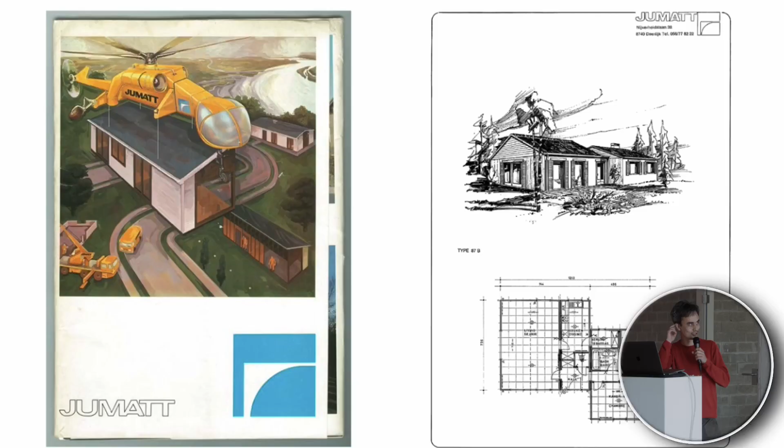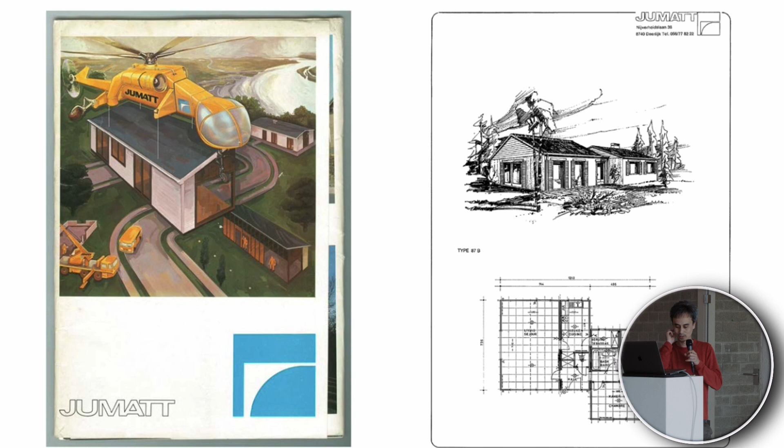So Superjumatt comes from Jumatt, which is a brand. It's a little project which doesn't have very much link with schools, but at the same time has a lot of thematics that we developed later on. Jumatt was a brand in the 70s for prefab houses. It was a bit like Jean Prouvé, what he tried to make in '54 with helicopter-delivered houses, but in a totally different context. Here it's more in a Belgian context. It's a bit industrial, but also a bit conservative.

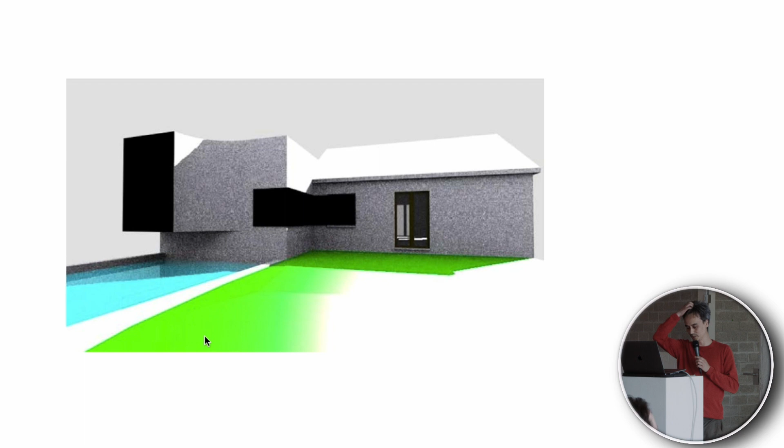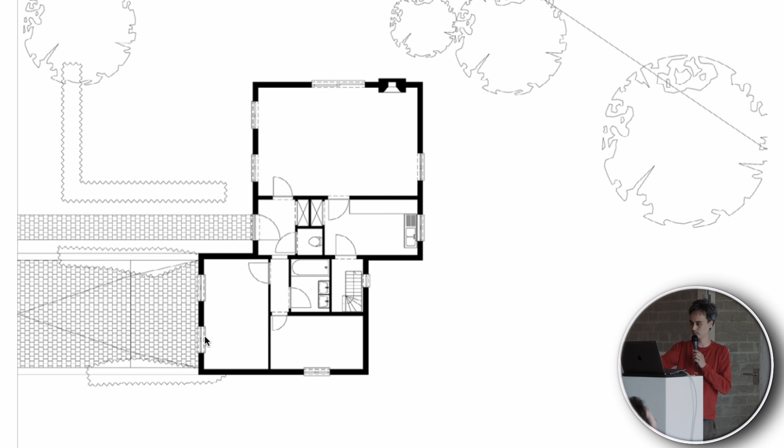So we show you first images of what we didn't want to make. The client wanted absolutely a kitchen and a pool at the back, but the context was so strong. We thought: is it really worth making an expressive contemporary little jewel at the back, or to really take the context such as it is? When the context is stronger, sometimes it's useful to use it as a first material. So it's a bit literal, but we extend it literally. This is the existing plan on the left side with the garage, and at the back on the right side the garden. We just add a kitchen and a swimming pool, and add a little living space upstairs.

So in section, it's like a half story going from the garage till the kitchen, so you can deliver your groceries and have the view on the landscape at the back.

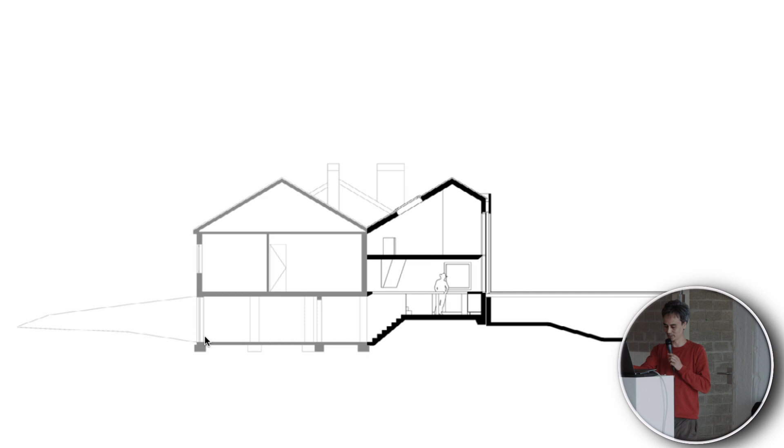So it was not meant to be an extension of high-class architecture, nor architecture of extensions, but more, our goal was to work on a global environment, with pitch roof, with wooden lintel, with the context.

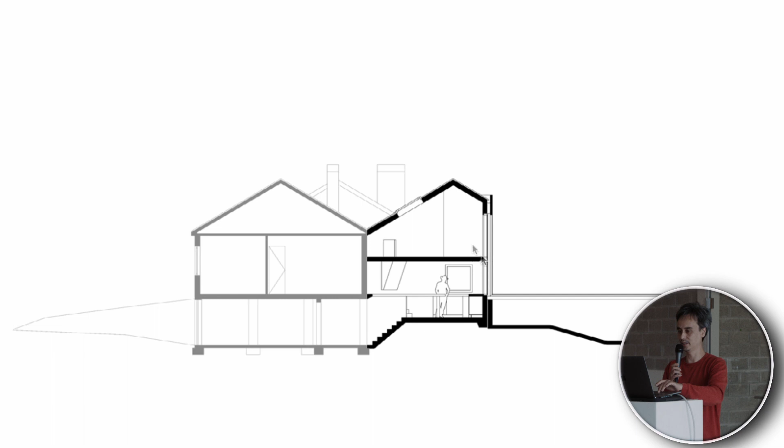So we developed the same lintels, the same details as the existing houses, with wooden lintels, with a pitch roof, but we decided to displace a bit, to have a cut. I'll go back to the section to begin really with architecture here, and not here, such as what was intended.

That's how details often go after a global idea, and it's not details for the detailing's sake, it's details that are developed with a general idea of the project.

I pass the mic to Michel, who will present another extension, but in a totally different scale and context.

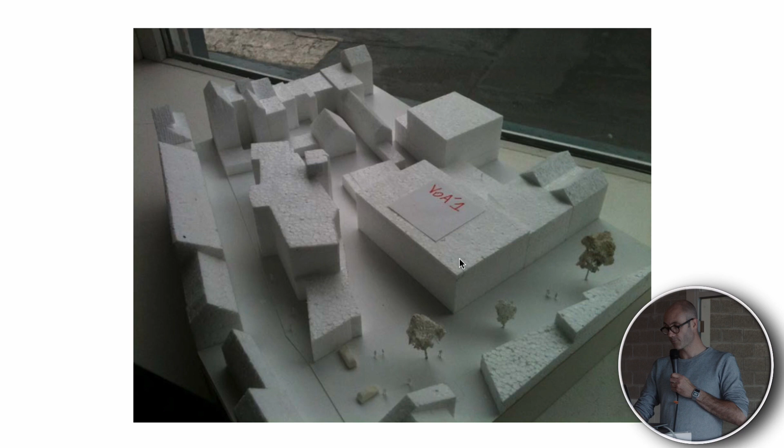And we had lots of trials. In fact, we took 2 years with the urban planners of the city to succeed, and after the 8th project we had a solution. So those are volumetric trials, but this is the solution we came to in the end, quite a simple one.

In fact, there are two main buildings. One for kindergarten and primary school fills up the existing urban fabric. And the other one is connected to an existing building of the school, but it's more a freestanding, simple block, which is quite high, quite dense. The reason is also because doing this we leave more space for outdoor spaces, since students also go outdoor.

In fact, this building, we will focus more on this one. It was too big to hide, so we decided to make a story of it, because the historical context and everything made it quite a discussion.

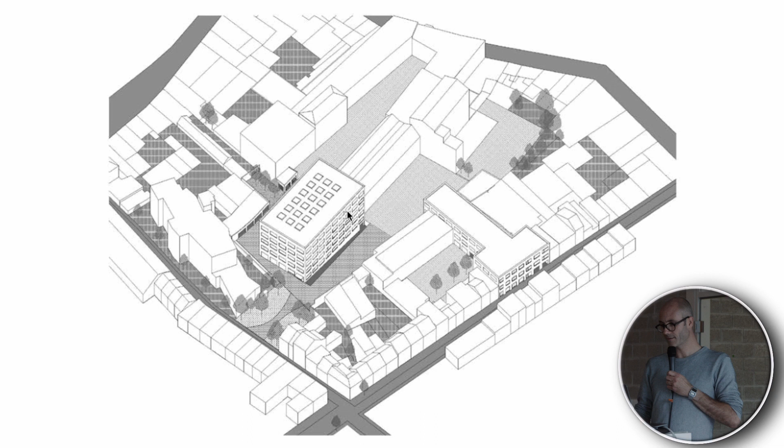And thinking about that, we just bumped into this existing building, which is not in Mechelen but in Brussels, not far from our office at the time. This existing building was quite strange, and we found it enigmatic, very monolithical.

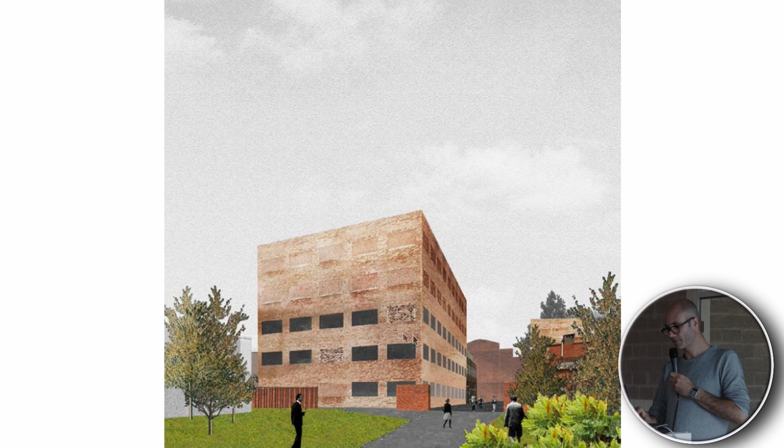You don't really know when it was built or what is in there, and we were pretty much interested by this strangeness, and we tried to transpose it into our block. Doing this, we found that there was an interesting dialogue with the big partition walls that were already on the plot. There were huge brick partition walls already there, that were not meant to be covered by the other buildings.

So we transposed this interest we got from the other building just to make it work. Was it there before, or is it an industrial building that was refurbished, or newly built? You don't really know the answer.

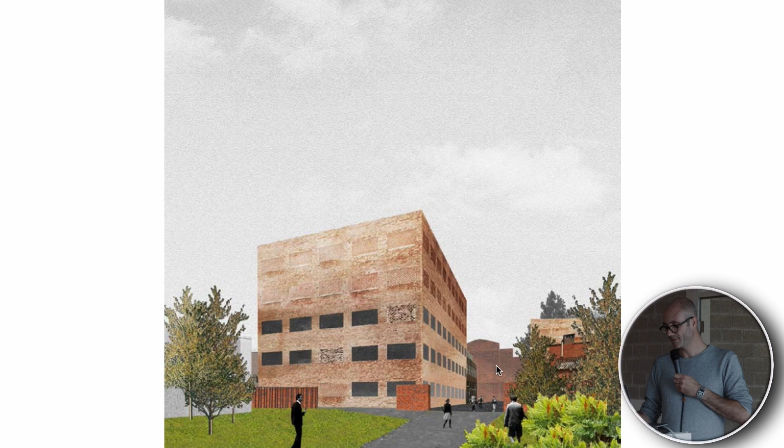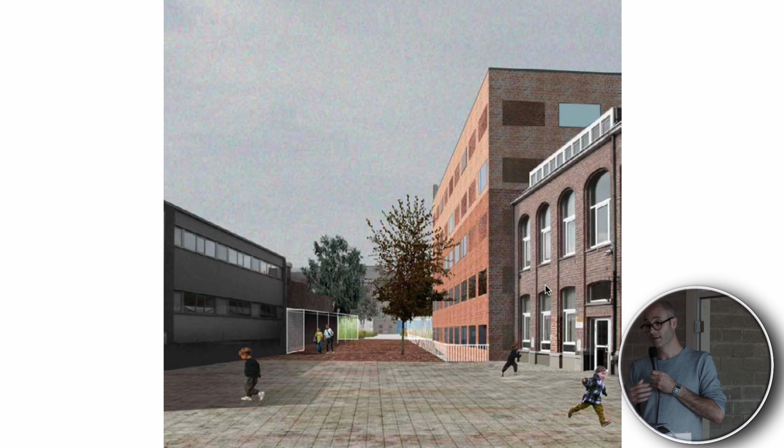And in fact, the solution turned out to be a good one, also for the urban planners. And even the client asked us to make it one story higher, because, let's say, if it's big, then let's make it big.

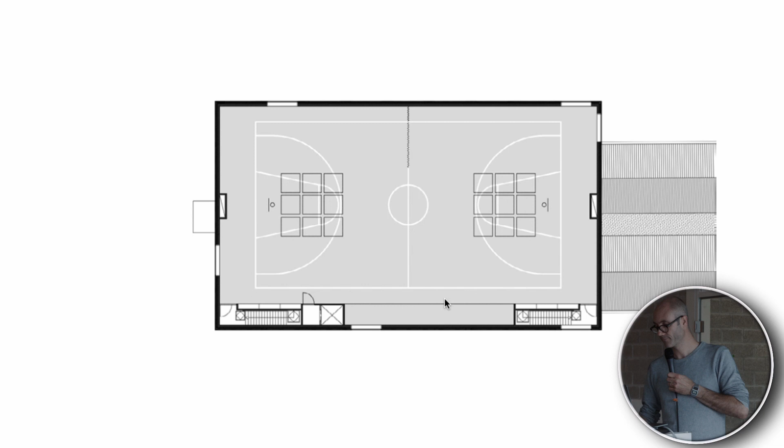Detailing a bit more this building. In fact, the volume is very simple, and it's meant to shelter the biggest space we had to shelter, which is the sports hall. So the building has almost the exact dimension of the sports hall, adding the circulation and the storage. We decided to put the sports hall on top of the building, quite naturally, because a sports hall needs a big span, and then we could cover the span with quite light steel beams.

If we would have put the classroom on top of it, it would have been huge concrete beams. So under the sports hall there are three stories of classrooms. Quite simple organization. In fact, there's a central circulation in extension to the circulation of the existing building.

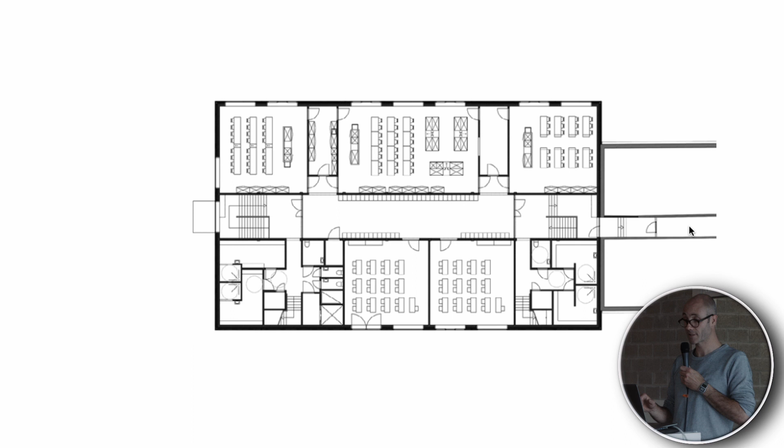As we're speaking about schools, and this lecture is maybe about school, those classes are lab classes, science lab classes, and they are meant to be connected together. This is the experimental space where the teacher can give a lesson to two classes at a time. So he starts with one, starts doing things like this, and then he goes to the other.

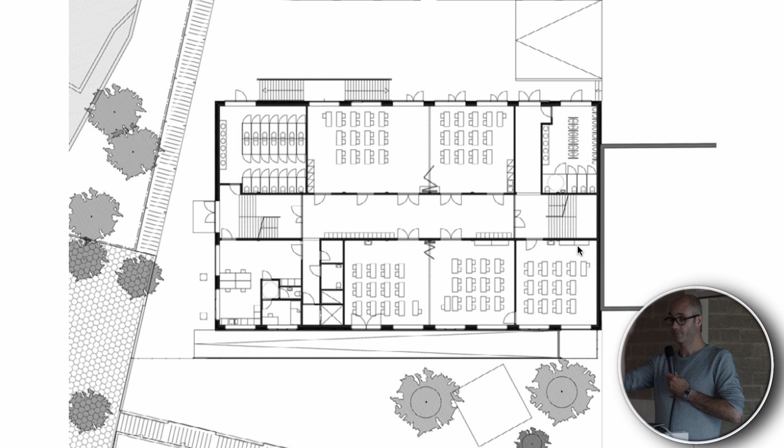These are the classrooms. This one is the lab. On a structural point, you can see it's a very simple structure scheme. You have two structural lines in the middle, and so those spans are smaller.

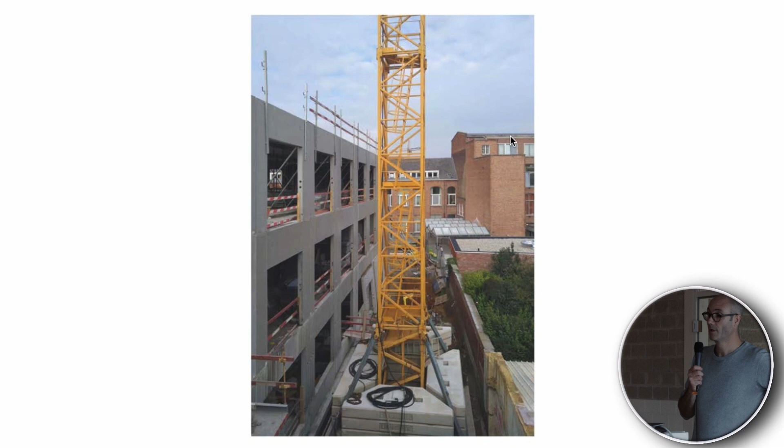We can use mainly prefab concrete construction because of the budget and because it's quite fast to build. This prefab construction is meant to be as generic as possible, as systematic also.

Our practice is to construct buildings that can become smart ruins. This is a quote by Bob Van Reeth, who was the Flemish bouwmeester at the time, and he said a building's structure should be able to be transformed in 100 or 200 years, and you can still use the building.

There will be slabs, there will be windows, and you can change the rest, but you can still keep the skeleton. And so on this very generic skeleton, we put a brick cladding, which comes a bit like a dress on the building.

This brick cladding also brings a solution to the inner plan, because some windows are not needed, so we just close them with the bricks. But still, we wanted to keep them a little visible on the facade.

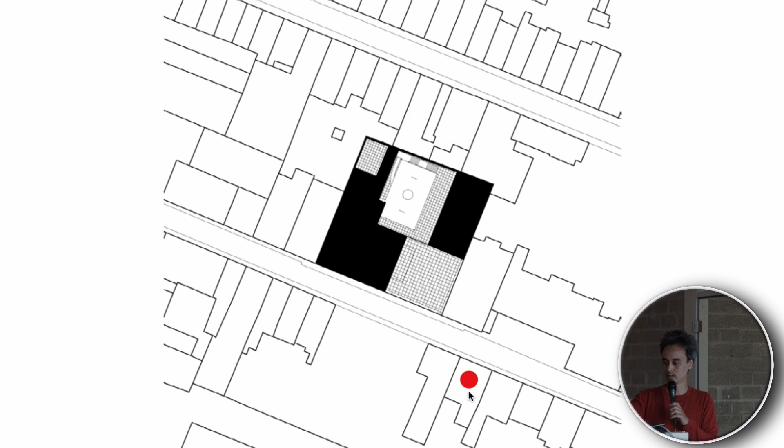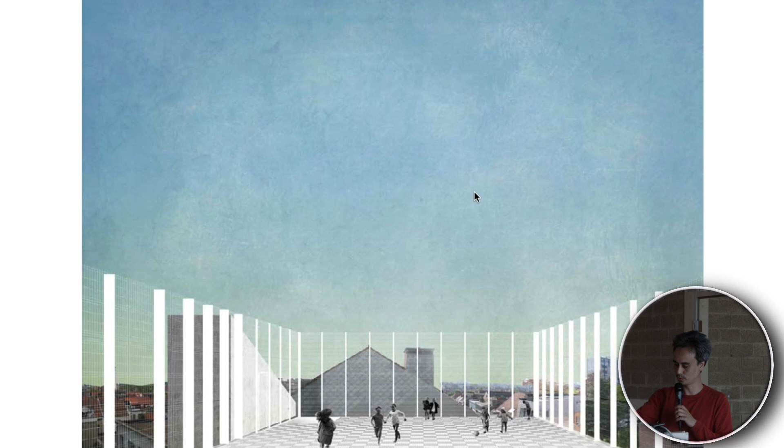So here is the existing building, and on the right side is the little houses. But we decided to add and concentrate the program at the same place, and to add those 3 classes right in the plot, for facility reasons, for circulation reasons, for everything. But by doing so, by increasing the density, you increase the context as well, so you have to take care of the outside places.

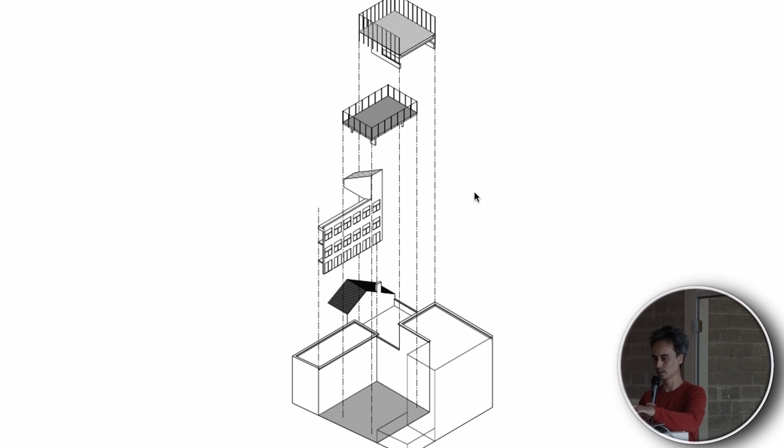So it needs open areas that are bigger. Here is the top view with the kindergarten places. It looks like huge interventions, but in fact it's really a lot of tiny interventions. There's the open space for the kindergarten at the top, the 3 classrooms just underneath it, another playground.

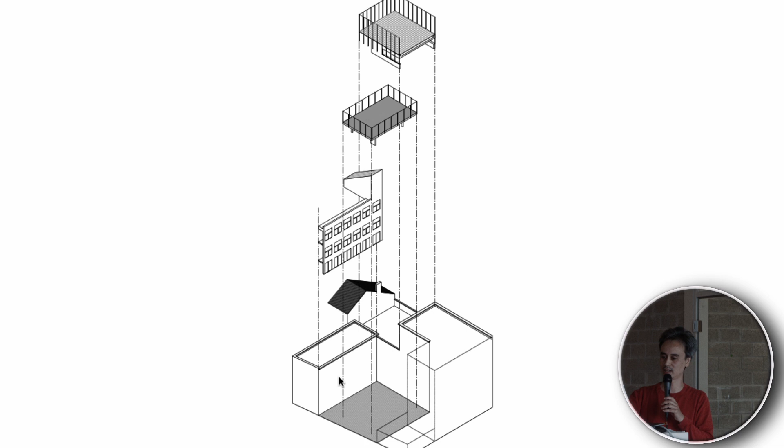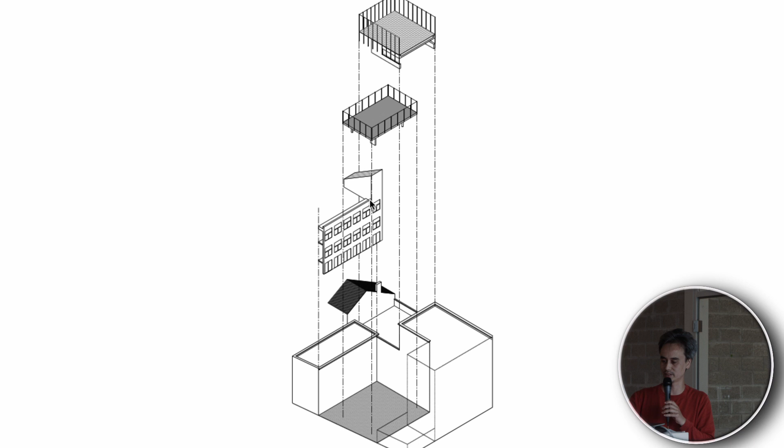Places in addition to the existing outside space, and a corridor that gives access to the existing classroom, because before that you had to cross one class to get to the other one. By adding that second skin, we could also - it's not ideal to have rooms with second daylight, but here it was so crowded that we've added really tiny interventions.

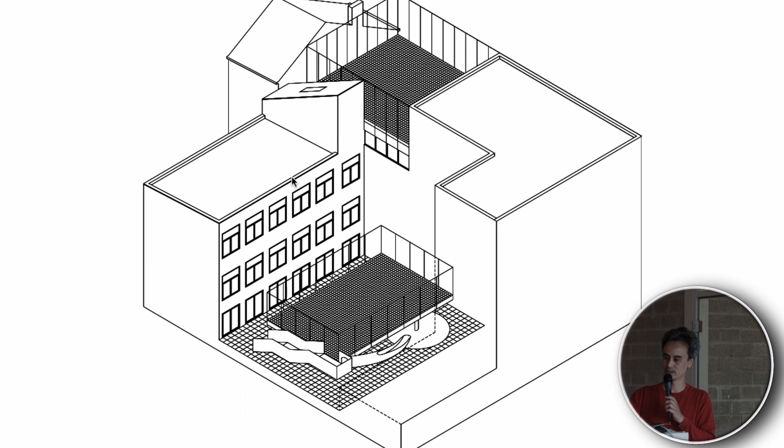Even so there are tiny interventions, we try to keep a dialogue and to be quiet with the different materials, so the interventions at the top have a bit the same quality as the one underneath. The windows' dimensions are the same as the original classroom, and we paid a bit of attention to the structure and the color of the existing materials.

So this is the plans from the top. This is the daycare, and they profit from that area at the top, looking at the streets. Those are really cheap solutions, just net for playground places, but by repeating it gives a lot of transparency. We also like to work with common materials and, by tuning them a bit, we often look at ordinary things with another step.

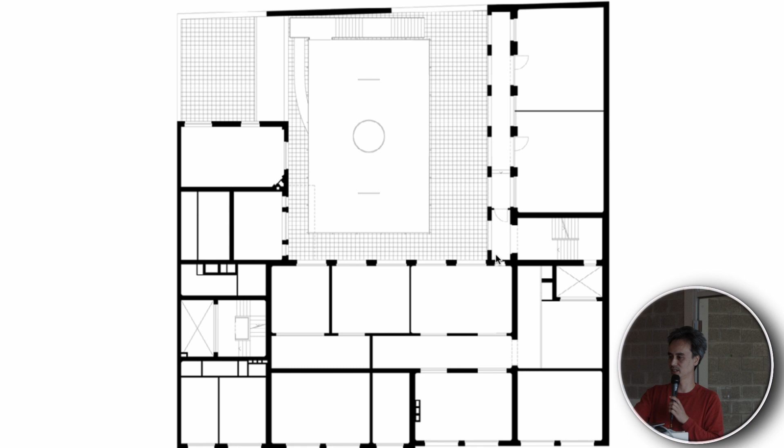So this is only the plan to show where the corridor stands, and that was the existing open area. This is the view from the inside.

This is the existing wall with a rough coating, we call it cimentage, Tyrolean coating, a bit rough. On the other side, the new part with the same windows. In fact, they are so huge that even if it's not immediate lighting, the proportions give a lot of daylight during the day.

The corridors are also used for other purposes. They are really well used by the children.

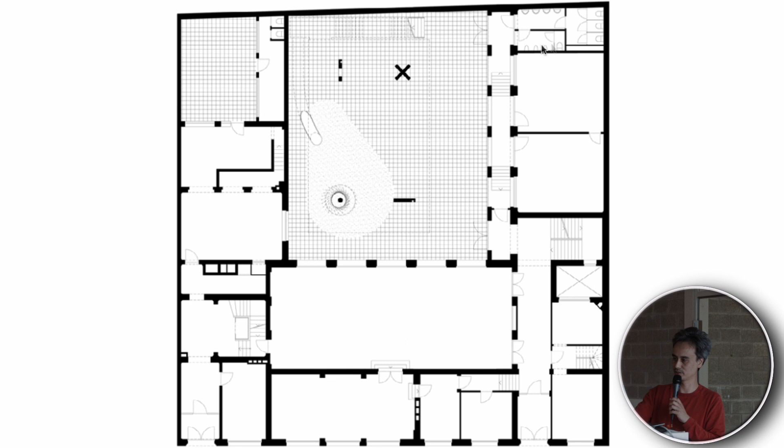Here it shows also the corridors leading to the different classrooms, the little sanitary block that was asked for, now inside. And this is a collage from underneath the open structure.

It shows the importance of the foot, that every foot, even if it's a kind of heavy beton structure, we can every time play with different elements and thus give a sense of small scale elements.

So as I said, every foot is developed as a thematic: to climb, to draw, to hide and seek, to slide. Even so, if it looks monumental.

What we like is also to play with the existing and the new building. Where does it stop? In fact we reused the existing bricks and decided to make it appear such as the extensions began here. But this is reused windows, this is reused bricks. By doing so, we push the limit further and compose with the whole plot, not just add a small jewelry, but play with the whole environment.

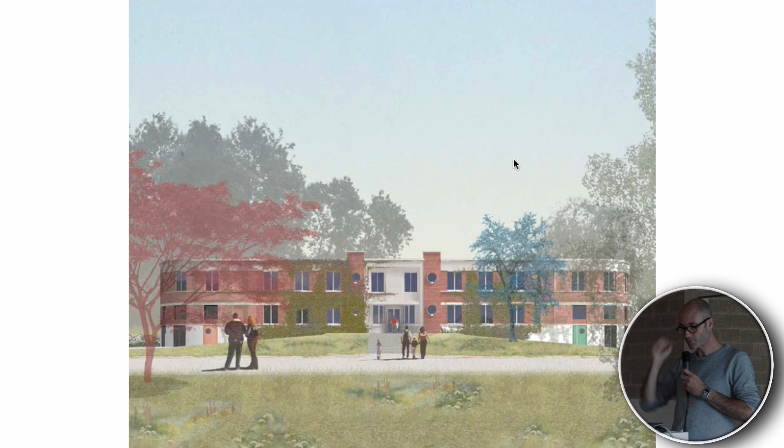It's located in a very countryside environment. It's a daycare center for autistic spectrum disorder people, quite heavy ones. And it's also a dwelling for those residents.

There are two dwelling units of 6 people. So the intention behind this is to keep it in a more family scale, so not to put a big dwelling of 12 people, but two times six. So there are already two parts of the program.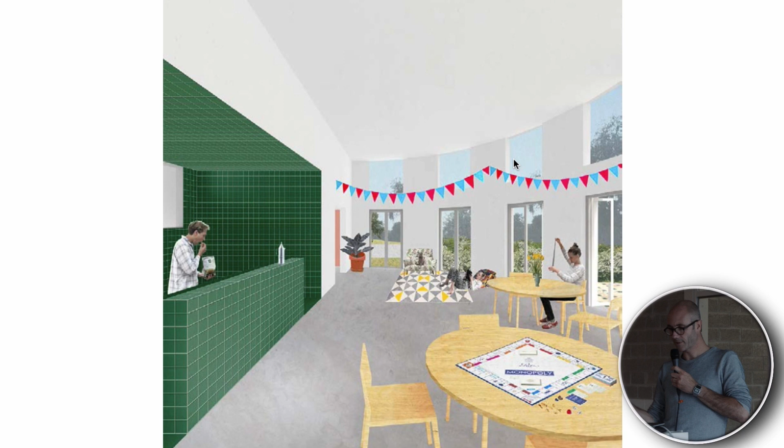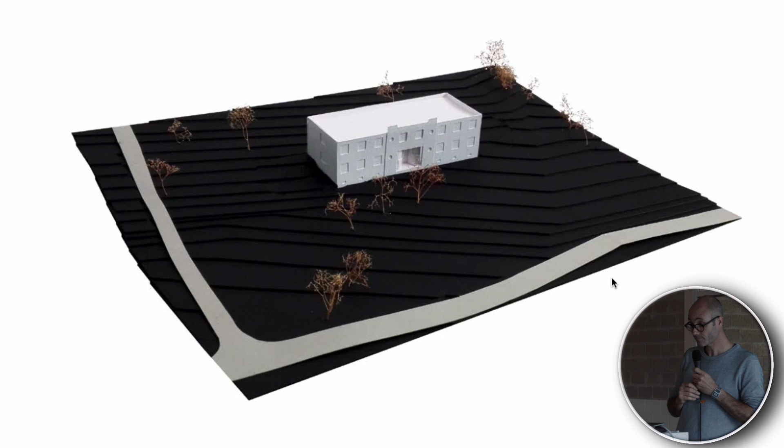So the first step we made in the project, which was a step asked by the client, is to get rid of the extension and keep the main building existing. In fact, at first the demands of the client and what was in the mind of the client was...

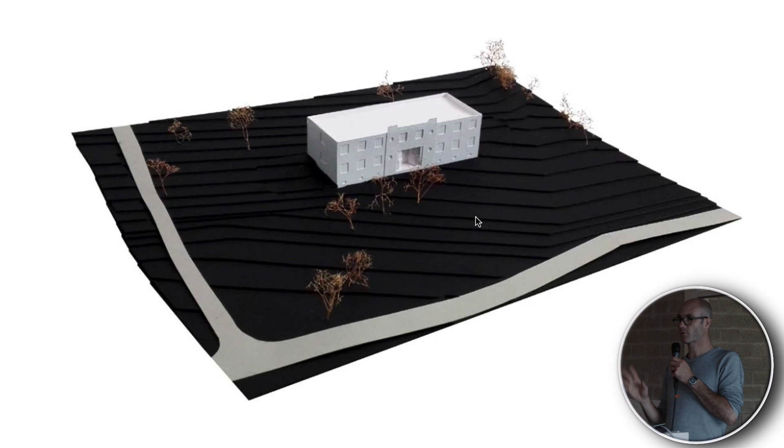to add a new volume, to put the dwelling area into this existing building and to make a new contemporary building for the daycare center, a separate building. What we did, as you saw before, is quite different.

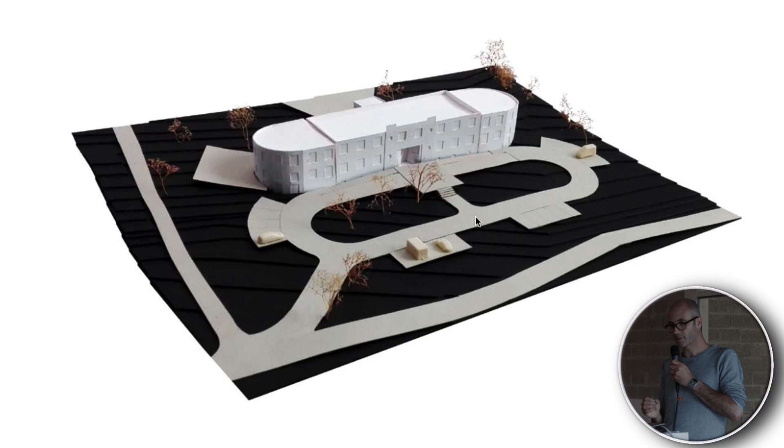In fact, we took advantage of the very symmetrical and rigorous composition of the existing building to extend it on the sides, putting the two dwelling units there.

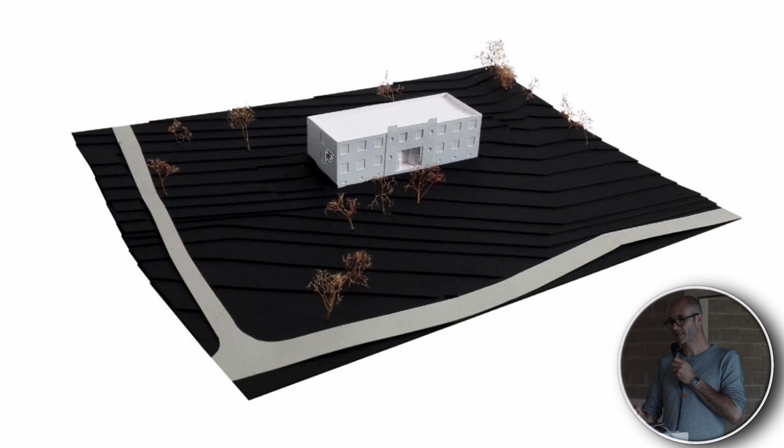So the program was already symmetric, so the building just asked for it, and we put these extensions on the side walls that were almost blind. There was already the connection for the new extension, in fact.

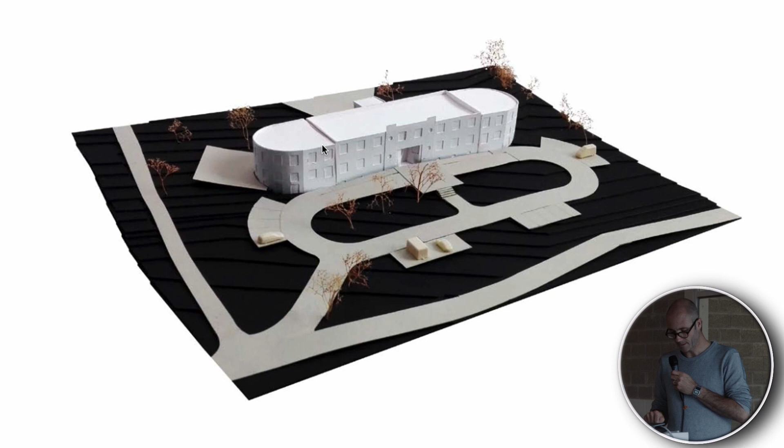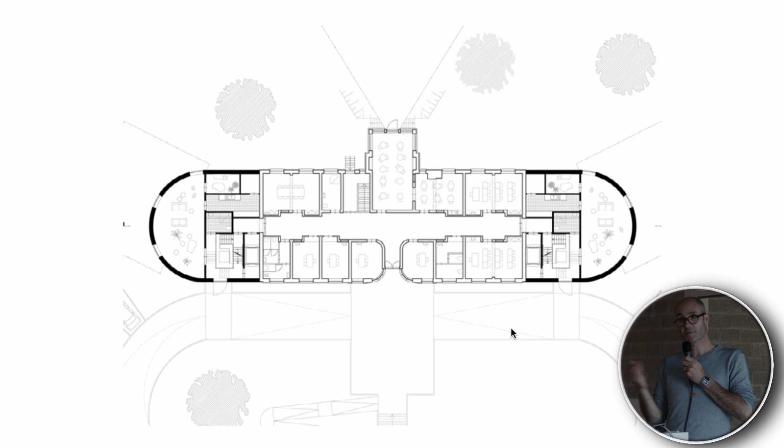Here is the living space, and they each have a separate staircase and lift. It was quite important, as we understood from the team, to have very clear spatial marks for the residents, so everyone has a door for the place where he stays.

On the first floor, here in the extensions, we have some bathrooms and also some play spaces and therapy spaces.

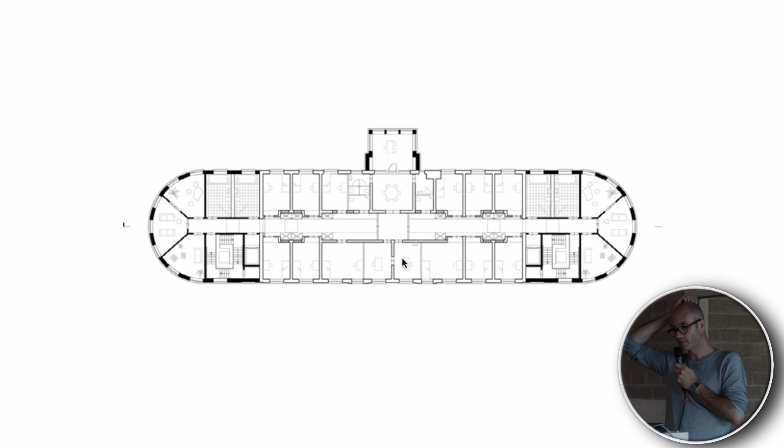And on the existing building, we find six sleeping rooms on both sides. And in the middle, you will find the offices of the team that stays at night, and the caring team.

In the section, you can see that the living space is on double height, and the first floor connects to the existing building.

This is a view from the caregiver office. You can see that the surrounding is very natural and peaceful, which is, I suppose, a good idea for this kind of program.

These are the living spaces, which are curvy. We were talking about it previously, but at one time the team told us that it was quite important to find some fluid space for people with autistic spectrum disorder. In the end, it becomes also quite convenient to finish the building and give it a feeling of unity, and maybe it gets back.

In fact, this existing building was built in the 40s, and it was built as a hospital, so it refers a little bit to the sanatorium of the beginning of the 20th century.

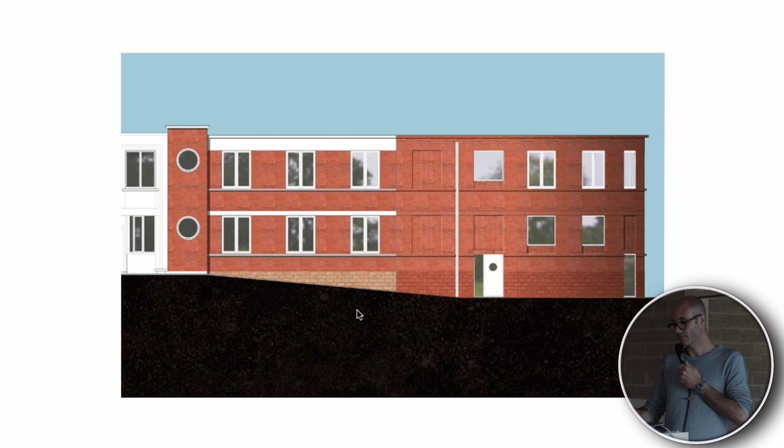So we used the brickwork, maybe more like a pencil to draw the facade, more than building exactly the same facade. So the white concrete lintels are now marked by vertical bricks, and we put some blind windows also.

This view we find interesting because you can see here how the existing building and the new one are interacting, and there is a bit of sharing with each other. This is the last view I will show you. It's almost at night.

And for the last project, Christophe will take over.

So that project is an extension of a sport complex with sleeping facilities aside for schools, but we won't develop that part. We will focus more on the project, on the sport complex.

It's also an extension. It takes place in a green context in the suburbs of Charleroi. It has also a tiny house with pitch roof and open green sports area. There is also a huge road crossing the site.

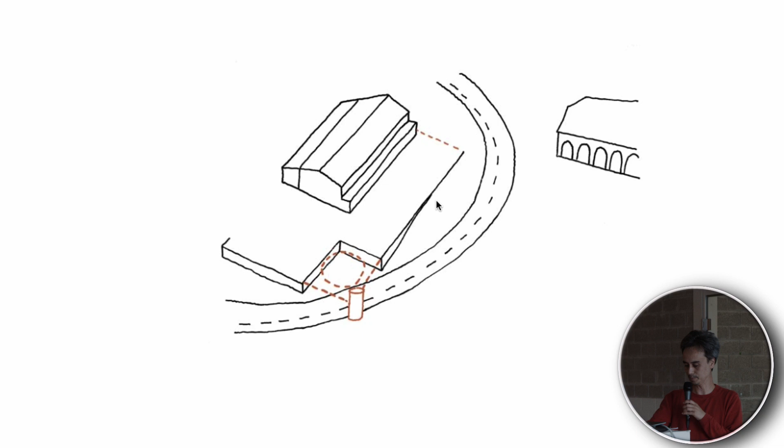So here are a few sketches. What was asked is a new sports area with a climbing room.

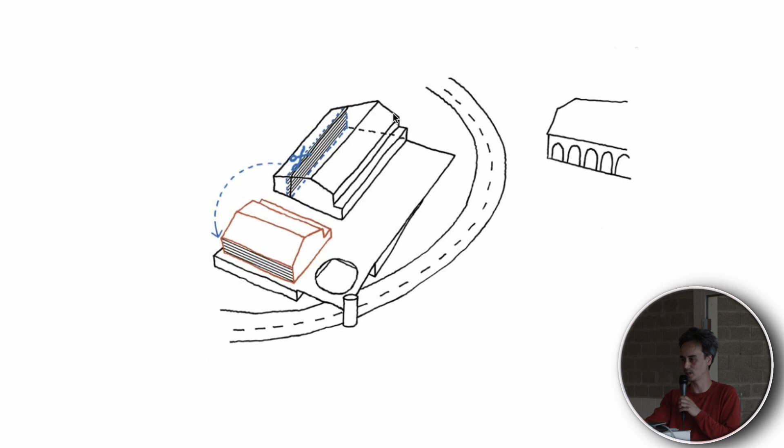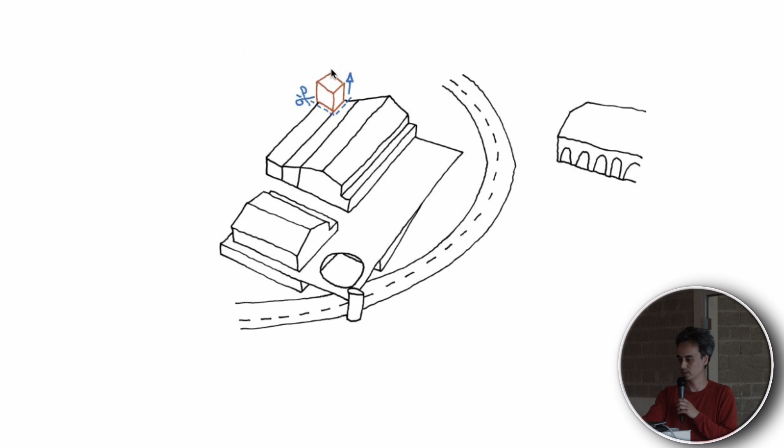We took that as more of a game, like a puzzle with several operations to fill in the program. Those operations, in the beginning, were a cut and paste, to extract and mirror things, to add things on a big concrete table, and to extract things for the highest climbing room.

This is a citation, a quote from a movie by James Gray, We Own the Night. We really like that movie. It's the story of two brothers: one is a gangster, and the other one is a cop. The project is also called Love, because of Loverval, but it's also a bit the story of our project.

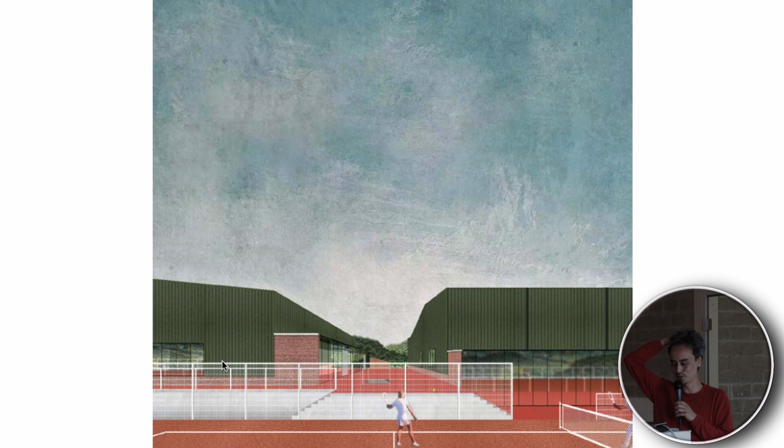So it's the story of two little brothers, two siblings. On the left side is the new building, and on the right side is the existing one. But by playing with them, by rotating them, we introduce a new relationship. Once we do windows on the new one, we also add a window on the other side.

Here there is a space of a tribune, which is inspired by the stockage, the storage room of the existing one. So, such as the first project, it's not a matter of doing a new type of architecture, but more to work with what's already there.

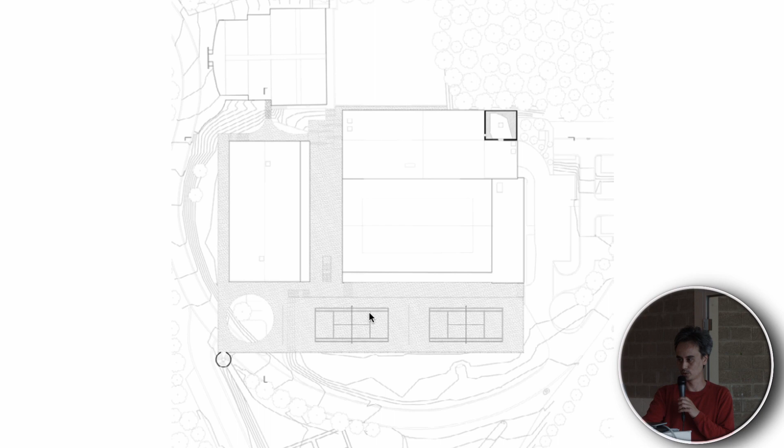So it's the plan of the site where the climbing room appears. Here we took it also quite literally. This on the right side is the existing building, and here we just extracted it from the earth and gave little details of foundation with co-altar, like if we just took it from above.

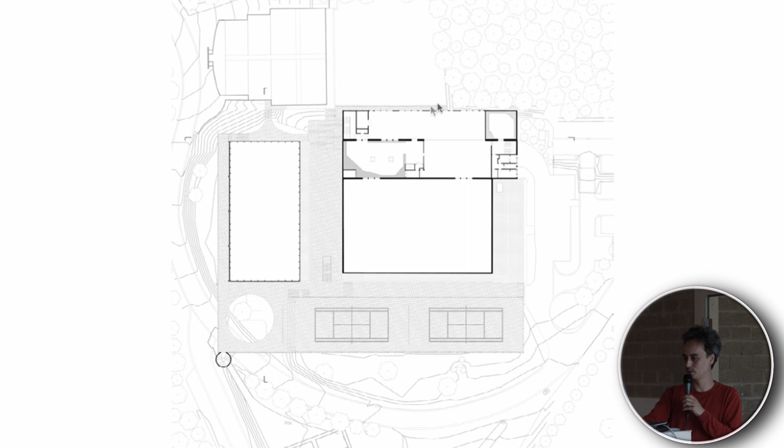And we played also for the multi-sport hall with kind of mirror spaces from the inside. Here is the existing spaces, and here's the new one. The dilatation joint is made with big mirror pieces, and we play on the material, on the ceiling, to have the impression that you really cross something, or that there is maybe a mirror. We play on tiny perception things instead of making wild operations.

On the other side, outside, we've also played with a kind of cut in the building. This is inspired by the inside — you will see it later on in the existing sports hall.

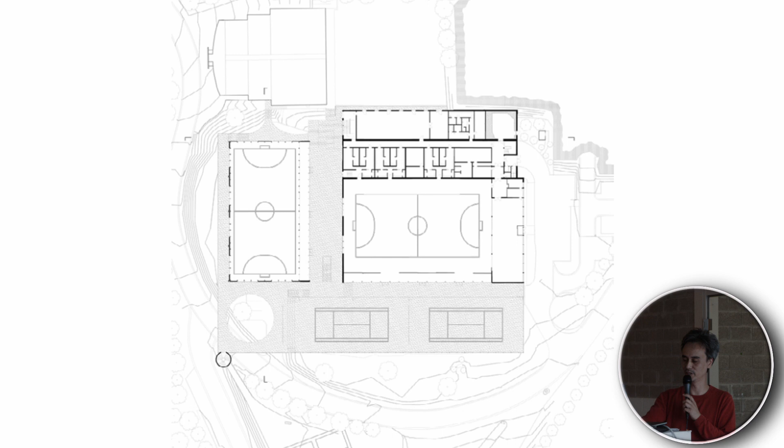This is the ground floor with two different entrances, the existing entrance and the new one coming from the sleeping places. So here again you have the new buildings and the existing ones, with the storage here and the tribune there. Here again, a rough cut inspired by the inside of the other building.

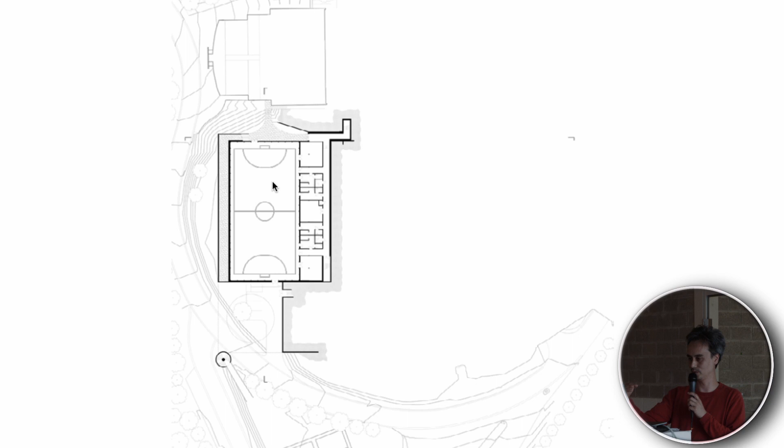Here the underground part, because it takes a double height for the sports room. In the existing sports room, we took advantage of the strong lower part in masonry, and the upper part is in light wood. This is the new hall, where the structure is a bit thinner to have a maximum amount of space inside, and also for economical reasons. We've put acoustic blocks on the lower part, and the upper part is just filled with wood. That facade is also the outside facade of the other extension.

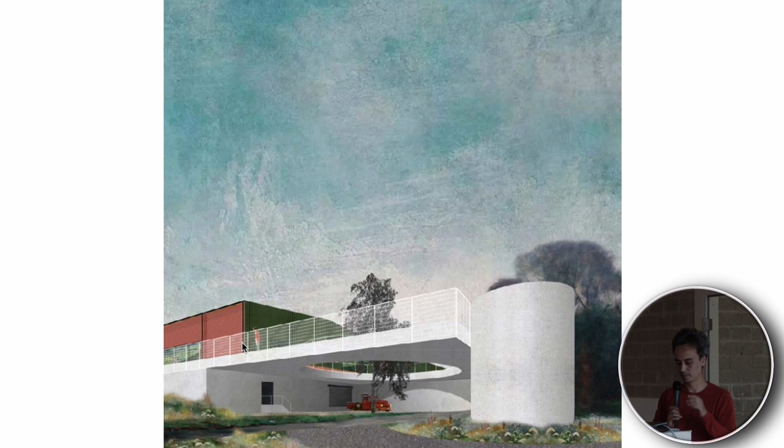So for the crossing — this is a photo collage, and we didn't want to look at it that way. We were asked to build a bridge, but we wanted first to make more of an extension of the landscape, to go on with that long table, and to give it really a sense of identity for the whole block. So it carries from the existing topography until the spiral staircase.

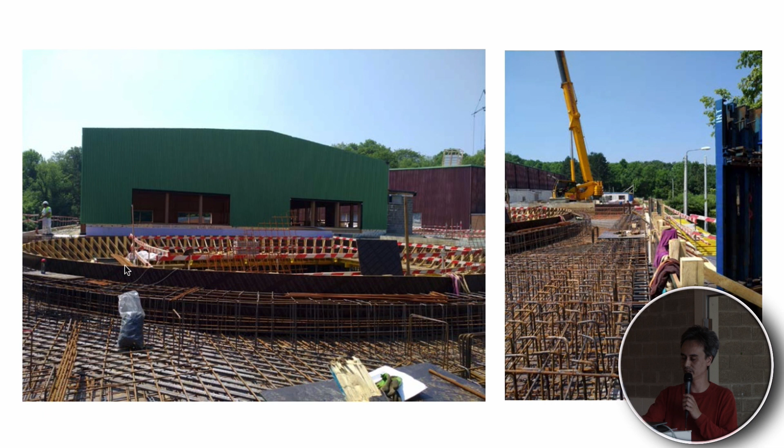It is built with pre-constraint, post-constraint steel. So you pour the concrete, and then you just screw it in order to have it horizontal. There is a lot of steel in it, and the huge hole is meant to have less material — for the engineer it's also less weight, but for us it's also to give a different perception between the road and the people looking from above.

So one constraint was also the heights here, the levels. On one side, it's just a common level, 1.20 m of handrail, and on the other side, it's horizontal, but it's the height of a net for a playground. So, here.

Where am I? Yeah, so it is, such as in the other project, more a work based upon the limits of intervention. It's more a huge piece of landscape than just a new architecture. By doing so, by leaving the aesthetic aside a bit, other issues appear, and it makes it sometimes even more interesting. So in the office we like to leave the aesthetics for later — aesthetics is more a result of broader things, but it's never a goal in itself.